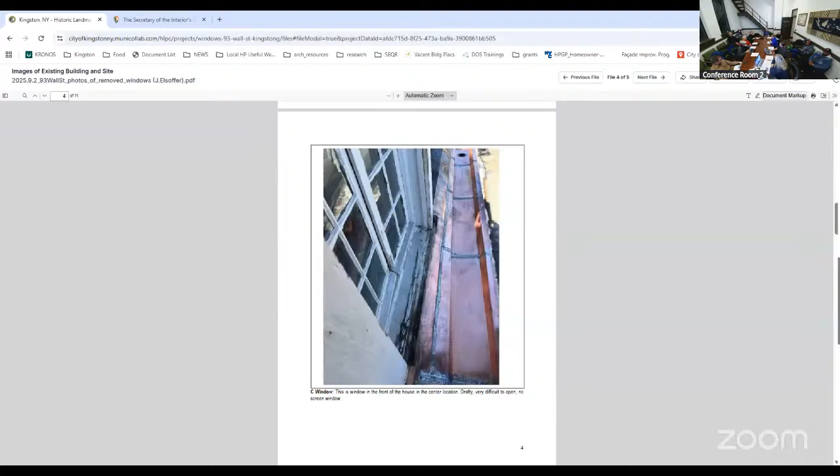We could put a pin in that for the moment and examine the windows that were submitted as part of the quote, and just ask: do the replacement windows that were submitted work at all? They're clad windows, French casement that open out. Do those appear similar to the former windows that were there?

There's one that was French casement that opens out, so it's two leaves. Then there was another one submitted that has what's called a simulated check rail going down the middle to make it appear as a pair of French casements, but it's a French casement window that opens in just one direction, not split in two.

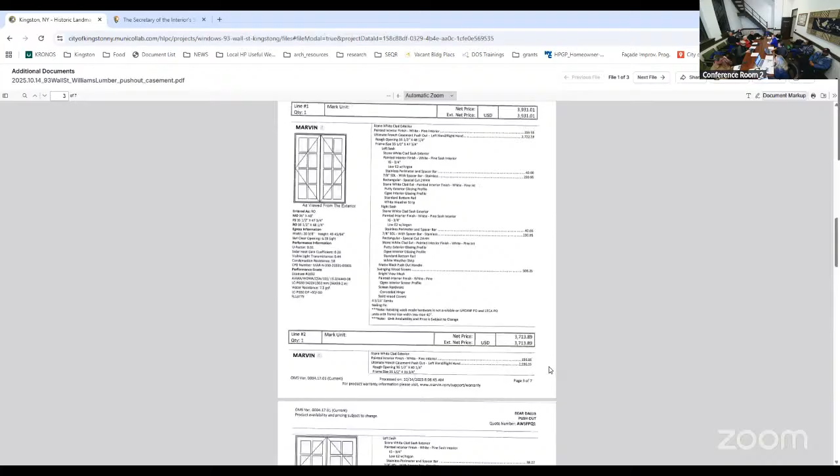We don't have a picture of this window. The actual windows are from Williams Lumber in the Marvin display. The sashes are made the same — it's clad, wood on the inside, clad on the outside. But in lieu of paint, it's wood on the inside. It's like an energy efficient window.

Like I pointed out to her, if they put the dormers on in the 60s and put plastic windows up there, I wouldn't want to replace them with plastic windows because they weren't the right windows — just for that front of it.

That's not what we're discussing, so I think we really have to stick to what would roll — the window units that were removed and, unfortunately, have been destroyed. So the commission has to really assess and evaluate what the replacement is for the front, at least the front. I think the front-facing ones are really very critical.

This isn't unlike other applications we've considered previously, where similar windows were rejected because of their materials and how they were made, and their integrity. So I think you really have to take a hard look at what these windows are made up of.

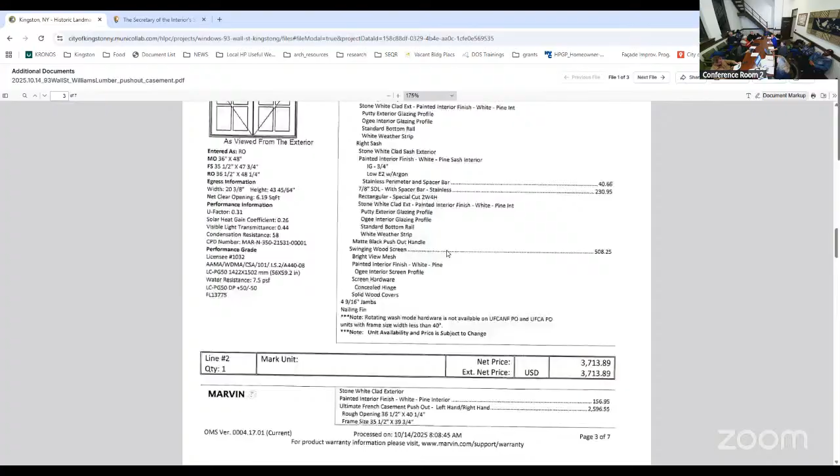Any other commissioners have any thoughts? The windows have been purchased. Yeah, they're installed — they've been installed already. I would hope it would go by aesthetics and what the right windows should be.

They just look — I thought it was so obvious, the right choice. That's the period, that is the period. Those are the only choice, logically to me, and the other ones just destroy the historical value of the house.

We went to so much trouble restoring — we did the built-in gutters with exactly the same shape they were designed, buying all the custom moldings, not changing anything, restoring and fixing the dormers because you either had to take them off or fix them. Everything was restored properly, even done with traditional, time-proven flat panel soldering methods of the period — everything was restored.

And all of the flashings on those houses are 150-plus years old. They just keep going — you can go over them with slate or copper — and none of it, gutters or overhangs or anything, had to be fixed.

Everything that was taken apart was dust. The pictures are there, but there were no structural beams. I had to load everything all the way to the roof, onto the beams, onto the house we built from scratch.

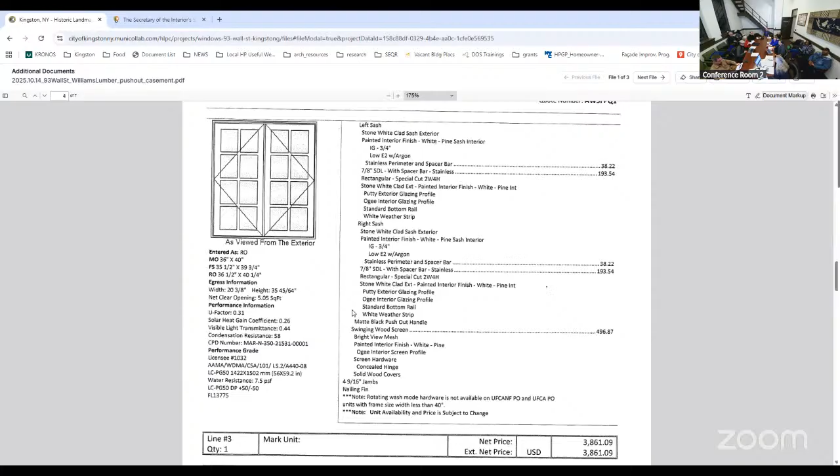Obviously, our goal is to maintain as much of the integrity of the structure as we potentially can. And when it comes to windows, they are an integral architectural feature of the building itself. So changing them to a different style—while it works in other places, in other similar stone buildings—that's not what was here. That's a big change, a big material difference, a big difference in design.

So then we try to find something that is more in keeping with the design, but we're also faced with the material issue. Looking at the proposed windows, materially, in my opinion, they don't really match.

I agree with Andrea about the operation. I think I could live with the operation not going interior, but going to the exterior—that's a reasonable accommodation request for a new window. But I do think the other windows didn't go in, they went out.

Oh, they did go out. I thought—could have sworn there was a picture that showed one going in. There's one in particular. Well, I lived in the house.

Okay, no, that's fine, that's good—because that looks like it's going in there. Yes, if that's taken from the outside, that looks like it swings in. Either way, out is the only operation, since it's crafted now. Yeah, out would be fine.

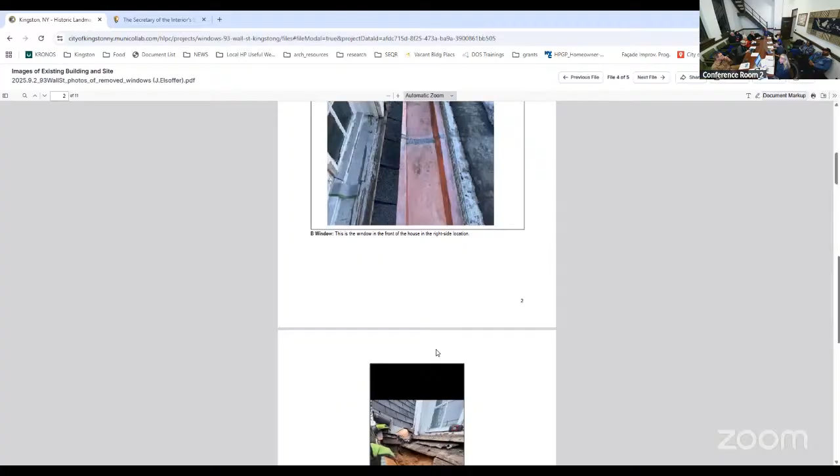Yeah, there's two wings all the way to the outside, but then there's two connecting symmetrical kitchens or what have you that go to those wings, and that's that 30s period that still has all those windows, with the double hung design. We want to honor what was there, but unfortunately when they did those, they put in dormers that aren't even structurally attached—they're just laying on the decking of the roof.

So do we feel that we have enough to make any sort of determination at this point? Do we want to go around the table here and ask whether anything proposed—whether the double hungs that are in place, or the proposed clad casement windows that are suggested—are any of those items appropriate?

I would just like to ask your expertise as an architect—what do you think, how should we proceed?

What I find unique about this is that I agree, though I haven't seen the structure myself—you know it far better than I do. But it marks a unique point in time when these dormers were added, and whoever designed and built them made a conscious choice not to go with the standard that was done in the area. That gives it a unique appearance. To me, it would be not just a material change, but a visual and artistic change to go away from that and do a double hung. So that's my opinion.

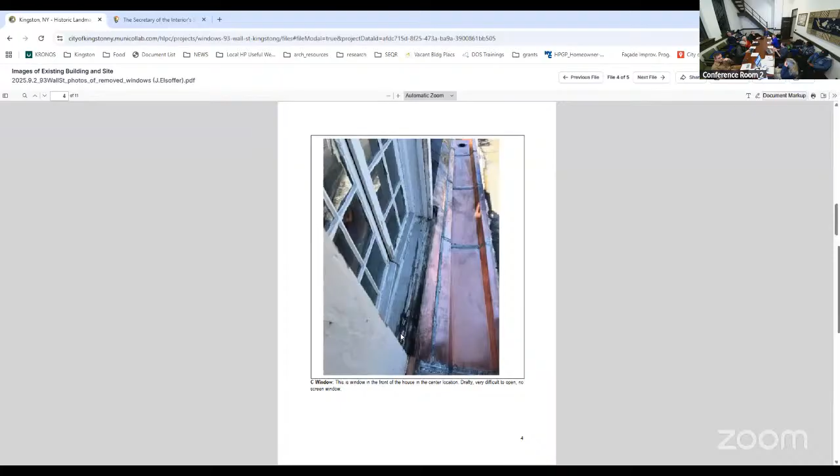But in this case, you had the material evidence of what was there, and you can document a period from which it came. The commission's mandate is for restoration of features whenever possible, and there's visual evidence that shows a window that appears, from the commission's previous comments, as restorable. What's instead in place are windows that differ in design, materiality, and operation.

Operation, again, is forgivable. Yes, you said. Right.

So I think that's the struggle we're all looking at here: how can we approve the double hungs that are presently in place, and even the materiality of the alternative which you submitted to us, also does not match what was formerly there.

Clad is not a wood window. A wood window has no cladding on it.

Another potential question about the proposed casement windows is that all three are proposed as 8 by 8 outward opening, but the historic structure, the center street facing gable, had a 10 by 10. So the question is, is there something that would more accurately replicate that as well?

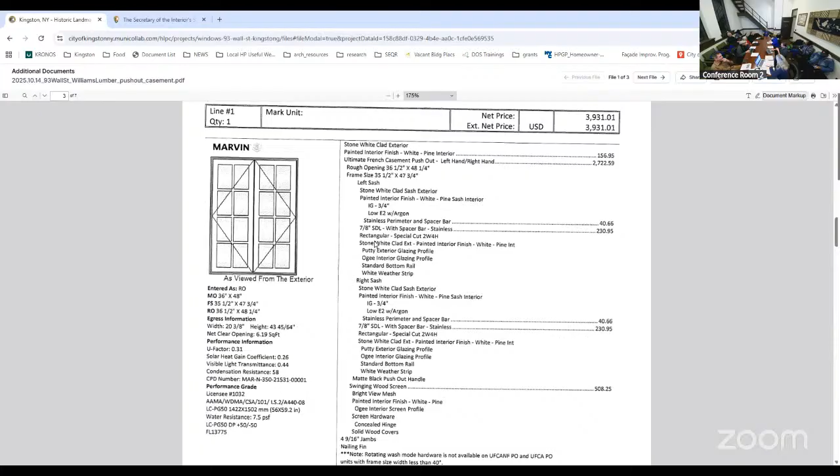I'm not 100% sure that they're even clad. They may be painted. I'm just assuming. It's very, very hard to tell.

Clad, it's obviously not like... well, it says that. Those are not the ones that are in there. I'm not sure if those are clad; if they are, I'd be more inclined to believe that the double hungs are too, but it's hard to tell. They look like they're painted. That's the look of it.

Well, that's the Marvin window. Good, it says clad exterior, stone white clad exterior. Okay, so they probably are. But it's not like a shiny aluminum or anything like that. It's made to look like paint on the outside, and the inside is wood.

Yeah, I went and got two different quotes for casement windows from Marvin and submitted them to the commission. But they've only shown one of the windows; they've not shown the other window.

Well, I think the question is, you're willing to change the windows back out. We would prefer to keep the double hung. If you force us to take out the double hung and put in a casement window, we will do that.

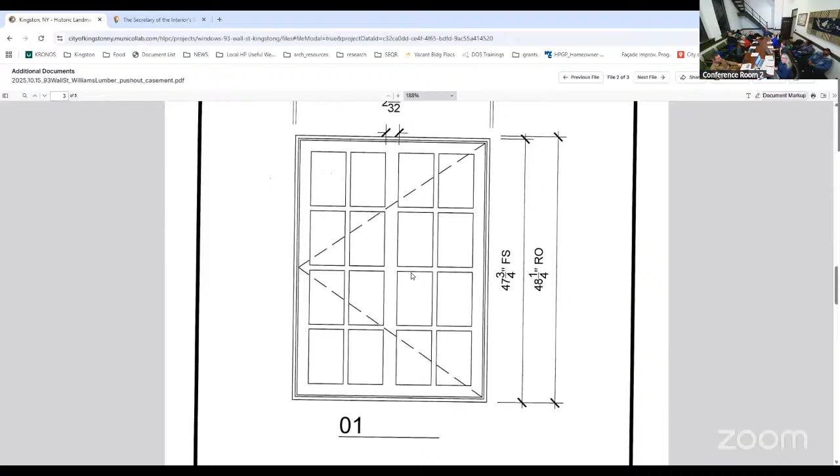So I guess now the next thing is that they went out after last month's discussions, where we went through all of the information and talked about Secretary of Interior standards. They went and found these windows at Marvin and presented them to us as an option to consider as a replacement window. So the question now is, does the commission feel that the clad windows they're proposing are a viable substitute as a restoration?

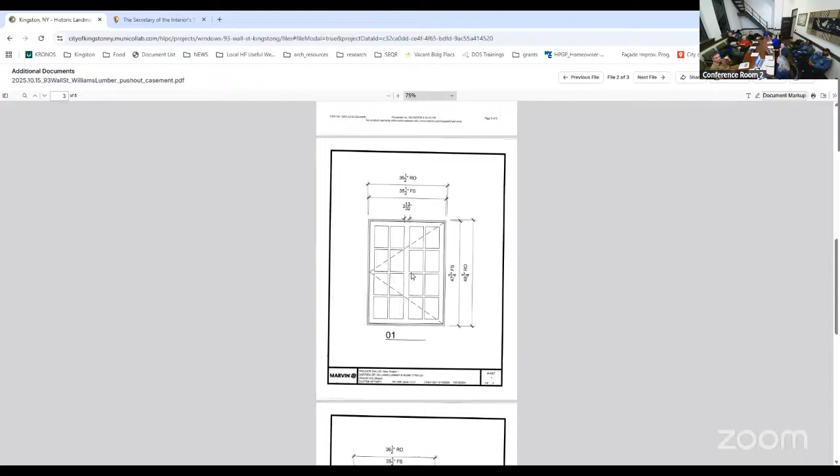Is there an alternative to that out there? Is there a solid option? I think there's a couple of alternatives. I think working first with a window preservationist would be a good first step to look at and think about what some alternatives could be.

I think Ethan made a good point that all of the windows were not the same window when they were put in back in the 30s. They all functioned the same, but they had different panes—you had 8s and 10s in the middle. So it's a choice, that set off that center, right? Which I think is a design feature and should be adhered to.

So it becomes whether or not you feel the clad windows that are being proposed are acceptable, or if you want to continue and have them do a little bit more research and give them a time period to come back with potentially some other alternatives, which is something you have done also in the past with applicants. Not a month, but give them a fair amount of time, a few months to really think about it and look and see what some options could be. And in the meantime, they have the current windows in place.

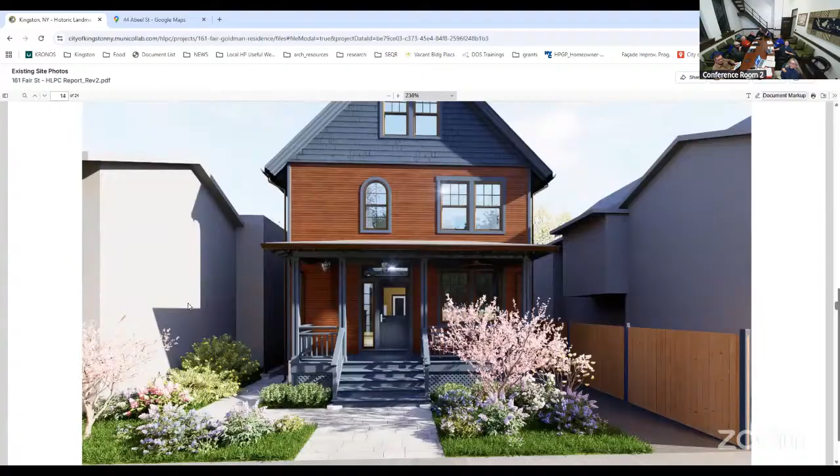I'm just trying to think if there are any features currently on the physical building that might be brought into the new design, just to tie it a little bit to the history of the site. So the flare of the siding - we have shingles on the proposed design, and we're gonna flare it out with a similar detail to that, when it transitions from the shingles to the wood siding, trying to replicate that detail.

The attempt here was to try and put back the original context of Fair Street. There are some beautiful homes from a different style, so we worked closely with the client to give them something they had also dreamed about. If you look at the columns closer, the detail is a Gothic revival, just to give it a little flair of what could have been, but it's not. So we're trying to tie it together with very simple elements, a little history of what was there, trying to give it a story. We cannot replicate the church, but just the flair of the shingles and having a column that...

Does that porch have a box gutter? It's, okay, just it has gutters, it's K gutters. I see. We have to really control the water.

Does the commission have any other questions for the applicant?

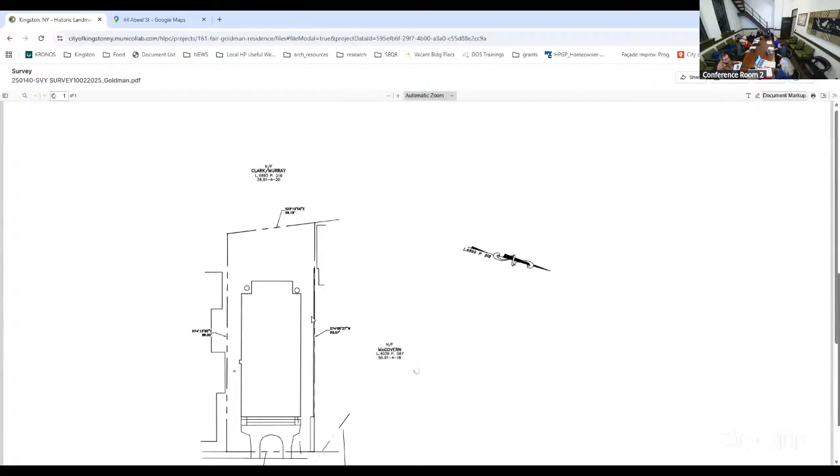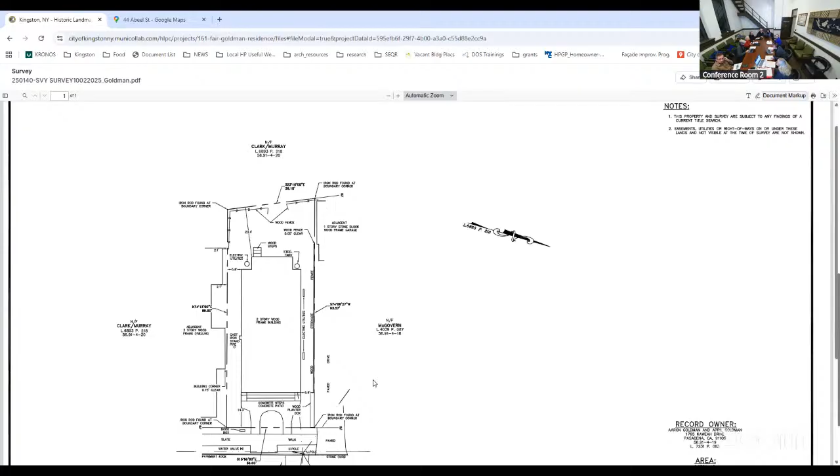I saw that, I thought that was the church. No, that's the old one - we got a new survey done. This is the new one. Look at the other document. You haven't submitted the new one. I didn't submit the actual survey, but this is the survey that was recently done. So that's still the same, that's what I was thinking, we're not changing it.

Please refresh me - you want plans of the new structure? This is gonna be under the deck, under the front porch. So from this corner, that is what we are building up, because there's a huge concrete block back there, there's nothing here. And the compressor's been dead forever, who knows.

So you're not proposing a curb cut for a driveway? No - she asked, can I have a parking space? I said no. What we're gonna do is more like a central walkway with bluestone to the porch. We are cutting over here a little areaway because we want to make the cellar have egress - there's room down there, this is all grass right now.

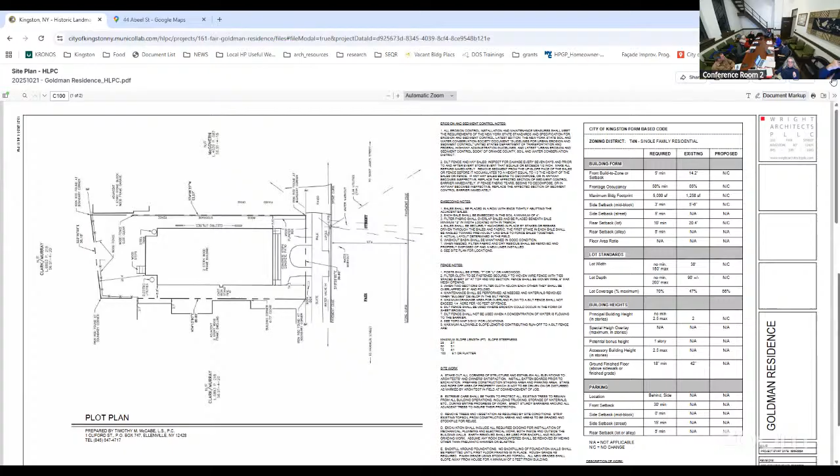We'll come out about 3 feet and have a door coming out for egress. So if you go back - do you have our plans anywhere? I didn't submit them, but I have them. I don't know if it's official if I pull them right now, but if you go to the package with the renderings, that is in essence the design we're proposing, and we will obviously submit the plans.

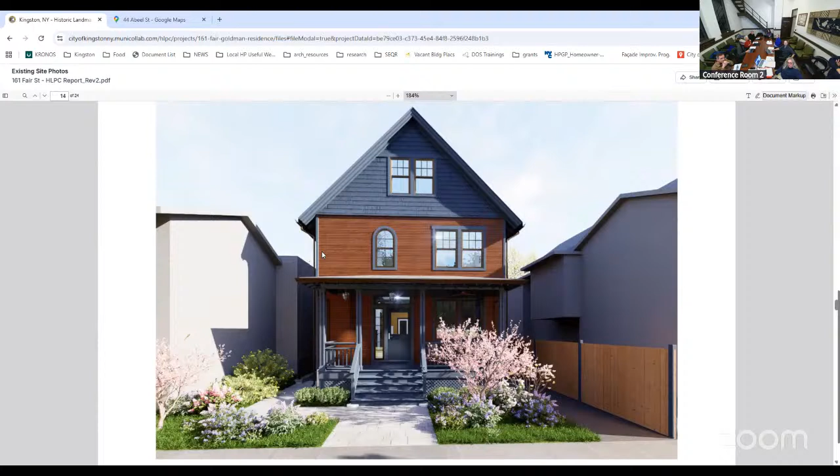The rectangular structure is sitting on the existing foundation. There's an existing sidewalk on this side we're trying to keep. This is all grass, but we're gonna cut - you can barely see it over there, because her son wants to be in the cellar, that's his room, but the only way I would do it is to give him egress. There is that tree - we didn't put that tree there. You would have seen the entrance to the basement.

Sorry to interrupt - would it be deemed appropriate to submit right now any drawings or not? That's the only site plan difference, just that egress, and it's up to the commission.

One of the things we had talked about, and spoke about a little earlier too, was if there's any way to incorporate any of the features of what it was, to try and give a little bit of a sense of the history of the site. I know you said there's a little Gothic, but it doesn't read that way to me - I'm not getting a connection to what was there.

I guess that's what I'm struggling with - I don't know how much of that similar type of construction we want to see. I might add you mentioned the shingles, for example, but the structure that was there, which you're not replicating, was more Greek Revival. So one of the things thought was maybe a few more Greek Revival elements as opposed to Gothic.

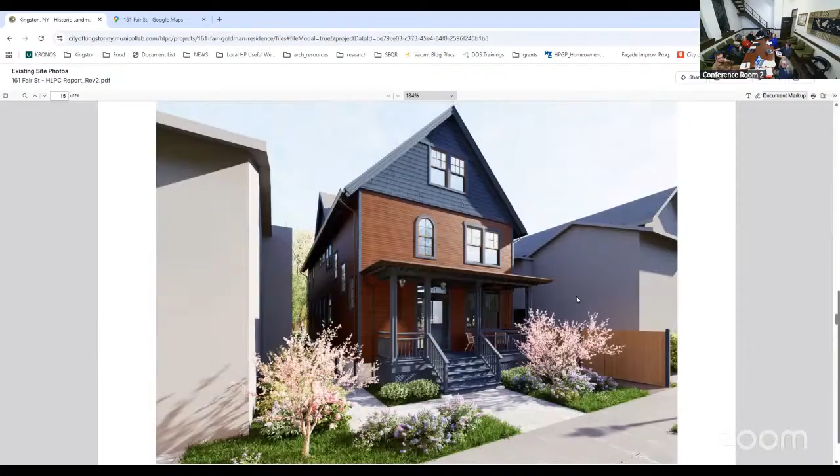The existing bluestone pathway to the former church building shall be preserved and reused for the purposes of developing and accessing the new dwelling. Is that consistent with our plan? Yeah, basically, you can see it. Right now it's a U shape, and that one is existing. So the bluestone, are you reusing that bluestone on site? Yeah. Are these concrete or is it?

Okay, so we'll take out the existing bluestone pathway to the former church building. The bluestone is actually the sidewalk, which is not one that has been addressed.

Any future changes or additions to the plans or work specifically described and outlined in the submitted application are subject to further review by our commission prior to work's start. The commission's approval does not obviate the need for a building permit from the Building Safety Division or any other required approvals from relevant coordinating agencies.

Based on the preceding findings of fact, I move that on the 6th of November 2025, the commission grant a certificate of appropriateness to the above referenced applicant for the work as described herein and its application to the commission. Such notice is subject to the conditions contained in the foregoing motion and is valid for one year from this date. Do I have a second?